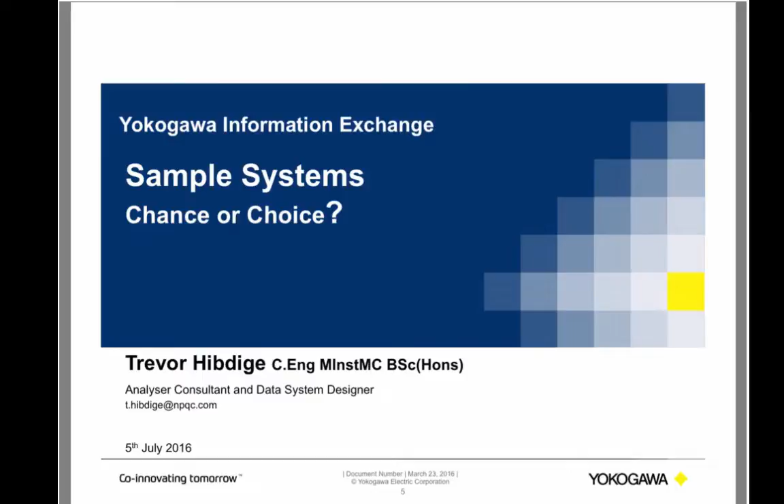So things have changed. One of the things that hasn't changed are sample system problems. So I've been asked to put together this presentation on sample systems. I've entitled it Chance or Choice. It's basically some key highlights about what goes wrong, why it goes wrong, and what we can do to stop it. So what I will do is launch straight in. We do have an opportunity for questions and answers at the end, but if you've got something so important that it can't wait, flag it on the Q&A as urgent, and we'll see if we can't build it into the running of the session.

So we're going to talk about some key areas for sample handling design. You've bothered connecting today because you have an interest in this. You may have specific problems in mind and need immediate help, but some of the areas we consistently seem to be working with can be summed up in quite a few bullet points. We're going to cover 5 areas - the classic pitfalls, which is where we do it wrong, and then move into how we could do it better. Basic design strategies will be a few key points that help us understand why we've gone wrong and where we should work towards, highlighting where we should be focusing.

One of the key areas that is going to come out of all this is understanding response times and what we can do about them and what are our expectations. As a wrap up, we'll go to future trends and try and throw some light on what's going on in development. So without any further delay, I will slip into classic pitfalls.

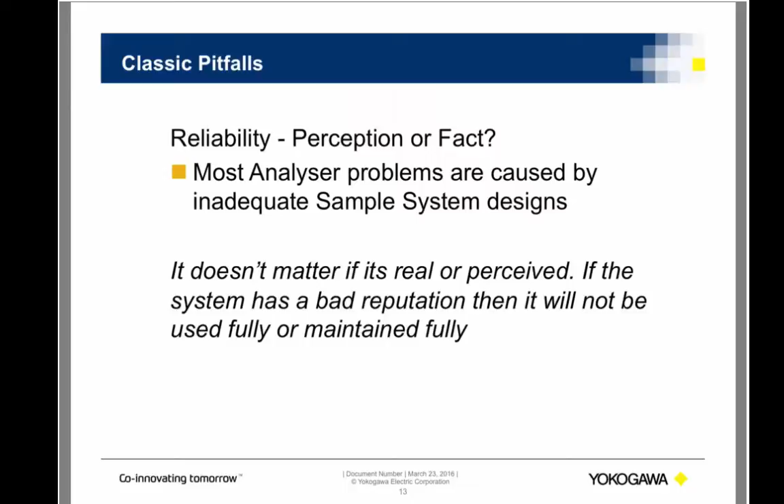And unless we address this fundamental pitfall, we're not going to get anywhere with our acceptance of an analyzer system or our design.

Response time is probably one of the most misunderstood and argued about factors in analyzer performance. And I'll make a statement here that an analyzer system that responds so slowly as to be boring or irritating to those using it or maintaining it will receive little attention and poor maintenance.

A lot of people can sympathize or empathize with that statement, and it's something that we hear today in 2016. But if you look at the publication date from this particular statement, this was September 1959 in the American Chemical Society publication. So we're looking at something that is 50 something years old, and it hasn't changed.

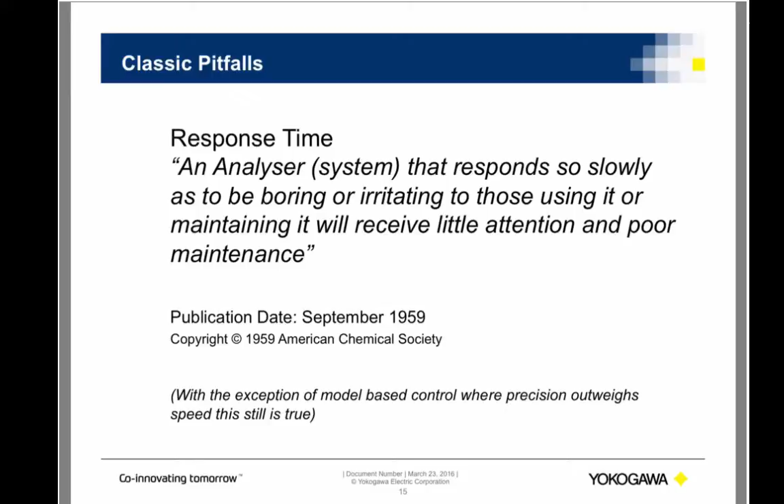With the exception of model-based control where precision outweighs speed, it's still true. Analyzers that respond slowly that are irritating and boring, we don't maintain them. We don't look after them, and they fall into even more disuse or upset the perception of other equipment.

So I want to summarize our classic pitfalls on this slide. Our primary consideration should be, who is the customer for the analyzer data? We forget who the customer actually is for analyzer information. We install an analyzer, but if nobody's going to use the data, what's the point?

We install an analyzer and the information is not timely enough, what's the point? Our customer is the one who ends up paying for the equipment, the user of the data, the maintainer of the data. And if we forget who the customer is, we will lose our focus.

Our customer is the process system, whether that be the process control system, or whether that be the environmental monitoring system, or whether that be the safety system. One of the things I've not mentioned yet is safety. Safe analyzer systems are a given.

I'm not going to preach about how we can design safe analyzer systems and how we must always keep safety in mind. That's a given. So whenever we see any statement, safety's in there, even if I'm not using the words.

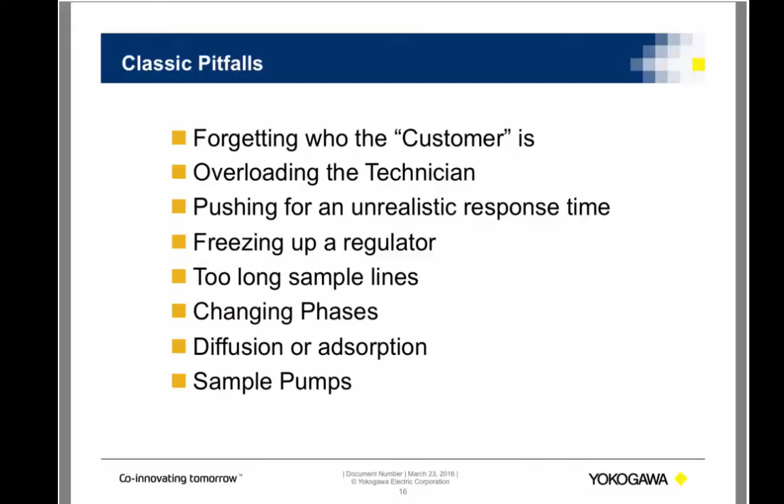So, basic design strategies. What should we be looking at? Where should we focus? So, basic design strategy, we should start off with what the analyzer needs versus what comes out the process. It's a basic statement. If the analyzer needs a vapor sample, there's no point in sticking liquid in it and expecting the system to work. It's fundamental, but the number of times we see the wrong preparation of a sample for what is being done to it. So this basic strategy is look at what the analyzer needs, look at what comes out the process.

The bit in between is going to be your sample system. If you make it complicated, it'll break down and it'll need lots of maintenance. If you make it too simple, it may not do what it needs to do.

The second most important thing in a basic design strategy is understanding the pressure drops that happen throughout the system. A lot of people are not familiar with what goes on inside a sample system. They want the sample system to do a job, but when we're talking about designing a sample system, we have to understand where the pressure drops are and what we have to do to keep the system working at its best efficiency. And that leads on to maintaining the system.

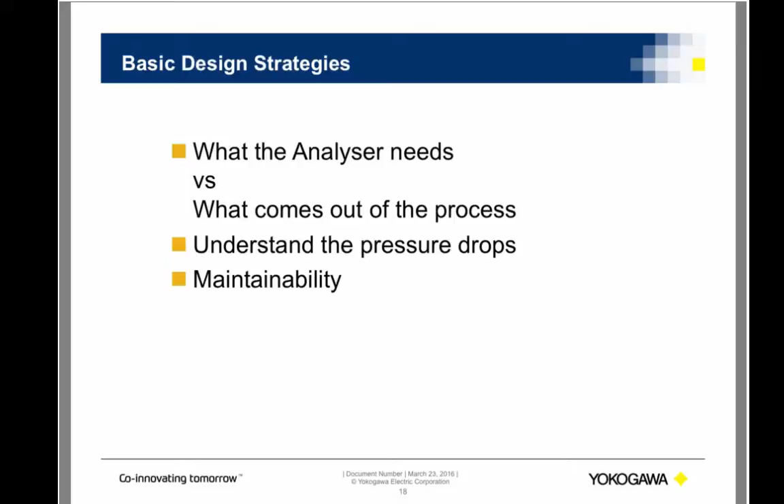Our basic design strategies should include pulling the thing apart, cleaning filters, changing bits and pieces. If we don't think about it during the design, then the technicians who have to maintain it are just going to look at the equipment and swear and curse and complain about another pile of rubbish come out of supplier A or supplier B, and why doesn't anyone listen to them? So what we'd like to do is try and work towards better sample systems, accepting that we will still need sample systems.

So where should we focus? Looking at our sample system designs, we've got some key areas and basic strategies, and we've got a whole list of learnings that we've done on other projects. We should not be repeating previous mistakes. So where should we focus?

Well, we talked about understanding the pressure drops. Our basic design strategy says we need to understand how a sample gets from the process into the analyzer and how long it takes to do that. In doing so, we need to understand the pressure profile within that system and the stability of the pressure. We'll go through some examples in a minute where technicians who work out on site know it only too well. You turn the flow control on one part of the system and it affects somewhere else because the pressure stability in the original design is not adequate for what we're doing with it.

So the flow control within that system is subject to pressure stability, but even simpler than that, the selection of flow control is a bit like when you open the tap to run a bath and you get a tiny change in the hot water, makes it go from acceptable to boiling and burning itself. A little gentle touch on the flow meter and the thing goes off scale. We need to understand the flow control mechanism and focus on it so that the system we get is maintainable and stable.

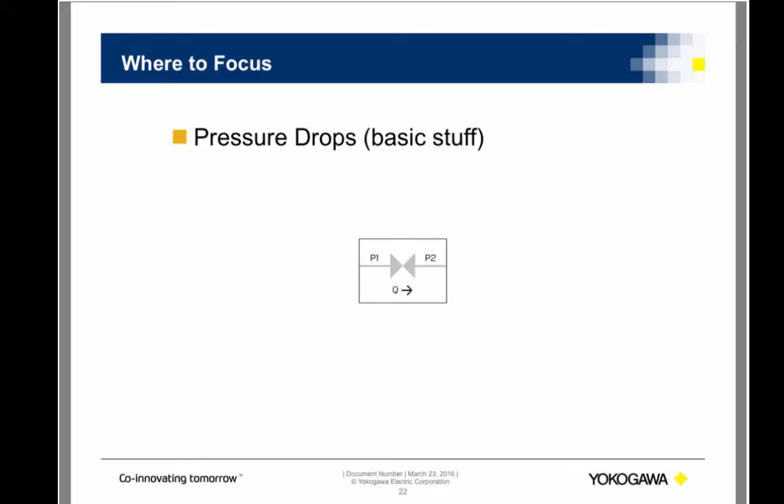Any feedback? No? Don't know. Okay, sorry about that, Trevor. Had to mute myself. Did you click the thing up in the upper left-hand corner, your pointer? That's it, that's what I had to do. Pointer, right, yeah, bear with me. What's the pointer look like? How about that? No? There you go. Yep, we see the yellow. You just circled something in yellow. Yeah, okay. Now, can you see I've got a big arrow pointing at this area? We don't see the arrow thing. So if I do that, can you see it? It shows now, the arrow showed up. Yep, okay, and how do I clear that? You might have to click next slide.

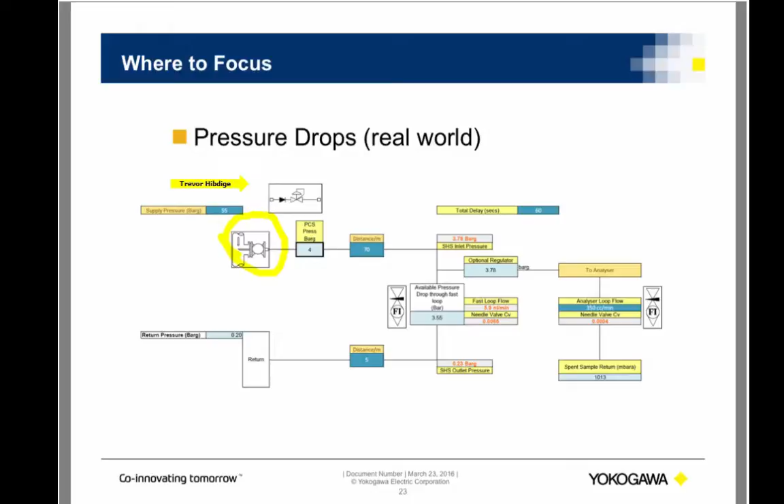In terms of pressure stability, what does that particular system give us? We said we put a regulator in here, so that should fix everything, shouldn't it? We stuck a pressure regulator in, pressure is controlled by a device. But if we go through and we look at what really happens in this system, let's push things to the limit.

Let's assume we have a 30-second response time requirement out of this system. It's hypothetical, but this is the kind of thing that goes on. We set our regulator at the takeoff to a certain pressure, but we ram so much flow down this particular tube to get to the analyzer that we lose a lot of pressure in the supply line. The figure we've got here is we're losing 30 to 40 psi, 2.3 bar, in the supply tube, and we end up with a workable pressure here.

It's not a problem. Everything's perfectly fine until we start changing flow rates. With a flow rate of 29 litres a minute, a 30-second response time - if somebody comes and fiddles with this fast loop flow meter, the flow control says that everything changes within the system.

If we just change that to 26 litres a minute from 29, that's not very much. We tweak it, the response time's only changed a couple of seconds, but the pressure's gone up here. We've got a change in pressure even though the regulator at the takeoff is unchanged. We've got a dynamic pressure balance within the system, and all that's going to happen here is this flow rate going to the analyzer, the flow meter will go up when we change this flow meter, and that is so annoying on site. Trying to balance a system designed like this means you spend half your time setting something and resetting something you don't need to do.

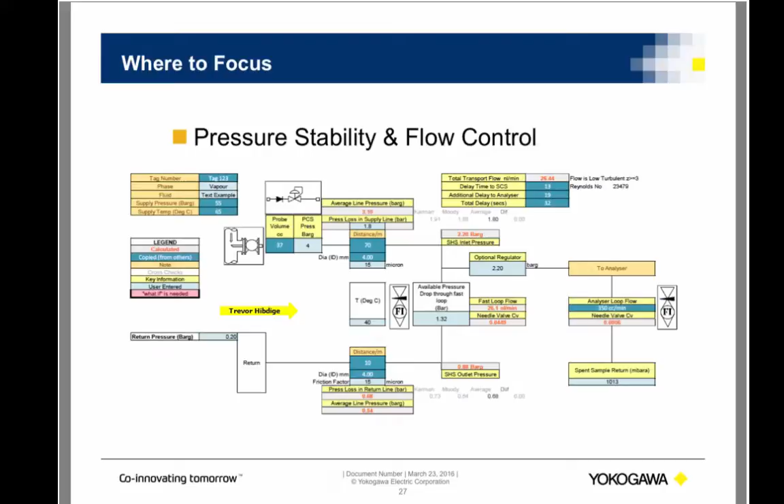We should spend more time looking at flow control, because at the end of the day, it makes for a better system, a more stable system, and one that gets a better reputation because we don't work on it as much.

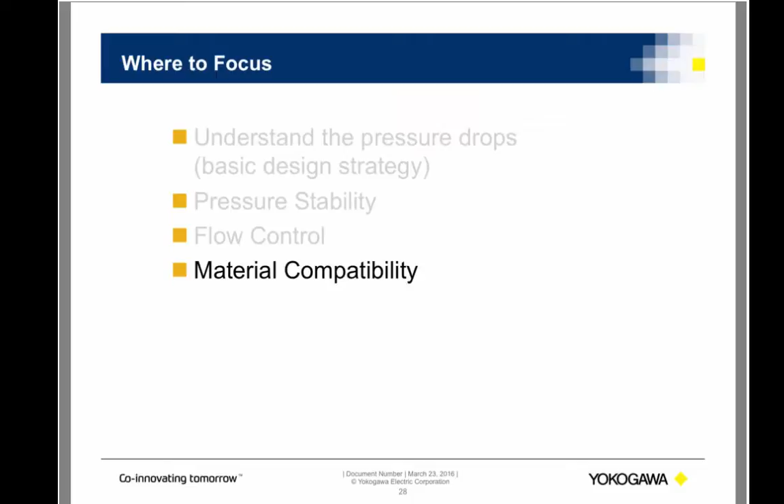Material compatibility. Our focus for material compatibility should be on our metals and our elastomers. We all know stainless steel is better than carbon steel. We all know that Teflon, PTFE, whatever variant, is more resistant but not as pressure containing. But we don't think about elastomers. We think we know that PTFE is better than Viton is better than nitrile.

But when it comes down to it, if we're going to design a sample system, if we're going to improve the reliability and maintainability of sample systems, we need to be better than thinking that we know it. We need to become more expert in materials.

The number of times we talk to suppliers like Swagelok, and they say, oh, we only make this particular variant. And we have to say, but as a customer, we want something different. We want something better because our particular application does not fall into your one part number fits all categorization of your catalog. So our material compatibility needs chemistry experts, it needs metallurgists, it needs people with experience and knowledge.

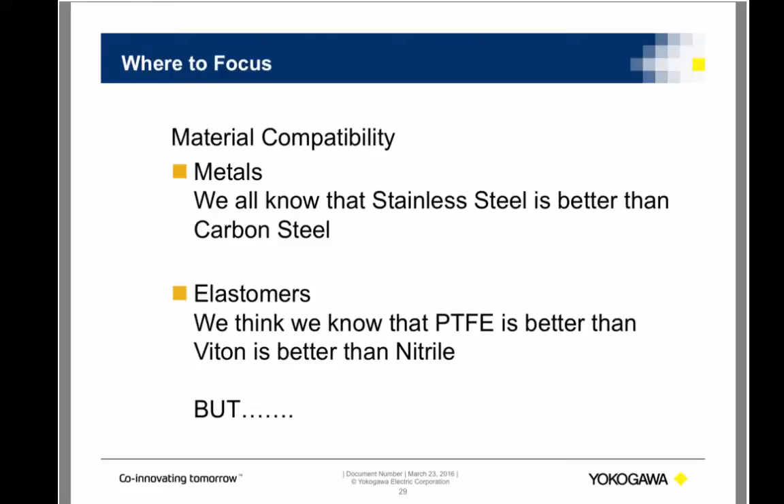And also people who are prepared to stick their necks out and say, I know that the best possible thing for this application is ABC. Far too many examples of people not committing to making a decision, and you end up with a system by default rather than a system by design.

So, moving on to understanding response times. Let's talk about what is the analyzer response time, what is the sample system response time, and when it comes down to it, we need to agree a response time for the system.

It's easy enough to say that the response time of our oxygen analyzer is a T60 response time of 120 seconds. At the end of the day, that's useless to anyone except the salesman who can quote you numbers, and we meet a hypothetical specification. T60 figures are useless, T90 are not much better. We need the time taken for the analyzer to respond to a change in what's going into it.

And if that takes 5 seconds, then at least we can quantify it. If it takes 5 minutes, it doesn't matter as long as we know about it and the application can handle it. We use cyclic analyzers an awful lot.

We still use automated laboratory techniques in automated titration and devices such as TOC analyzers. They have a finite response time. They take 8 minutes, shall we say, to produce a result. So their minimum response time is 8 minutes. And it's no good a process saying, oh, we need a 60-second response time out of the TOC analyzer. If it's got an 8-minute cycle time, it's never going to be 60 seconds.

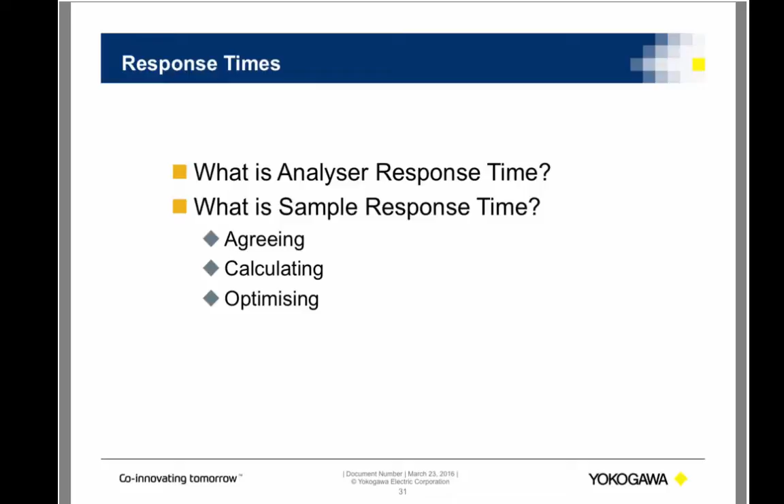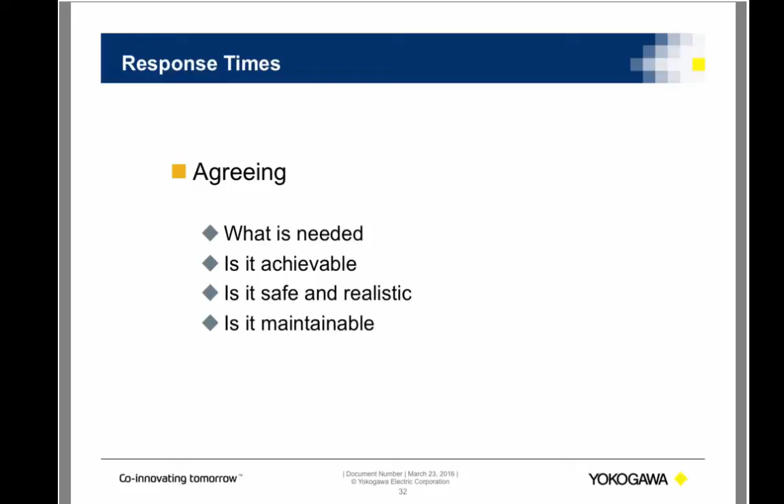Somebody once said, oh, we've got to have a response within 1 minute. Let's agree a response time for the system, and if we can't meet that response time, let's calculate what we can actually achieve, and then let's optimize that response time and then discuss, is it acceptable? Rather than just throwing this 60-second figure in, we need to know what is needed and is it achievable, and to achieve it, is it safe and realistic?

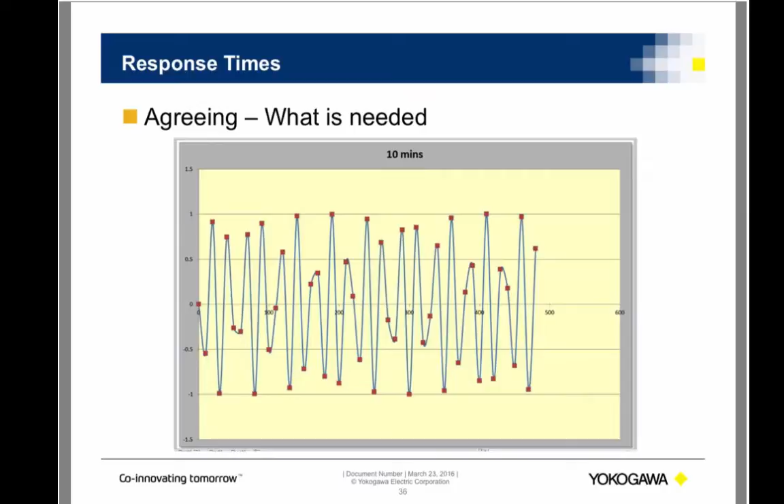If we reduce that response time to 30 minutes, our picture changes again. I'm coming to the point where we can see what is happening by making the analysis faster. Look, if we go to 10 minutes, the picture is completely different. We started off with a 2-peak sinusoidal curve, and this is maybe what's going on in the process.

Agreeing what's needed is one of the starting points to enable us to design the system. And if the process responds so fast that we need fast results, then that's fantastic. We've got a starting point, we can try and design it.

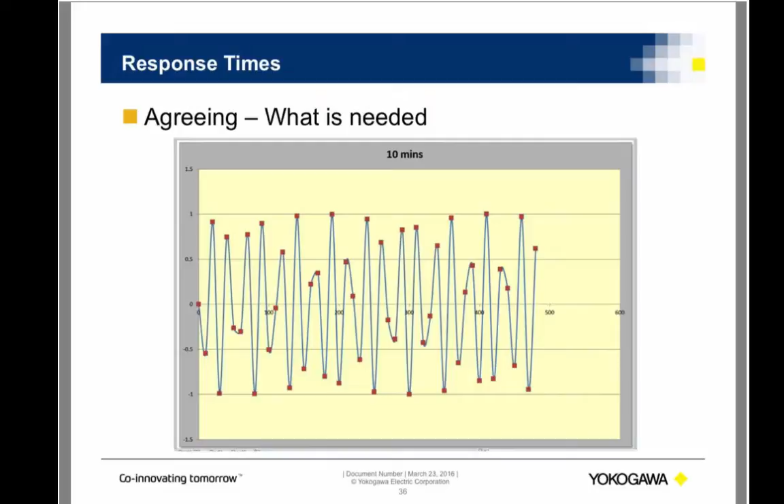But if the process takes 12 hours to respond to a change in concentration feeding the reactor, then we don't need a 60-second analysis. It's a kind of accepted norm that your measurement has got to respond at least twice as fast as the process. Otherwise, you can't see what's going on. So, general rule, somebody tells you 60 seconds, well, the process has got to be changing within a couple of minutes. And if it's slower than that, then the 60-second rule shouldn't really apply.

Having established our response time, we need ways of calculating it. And I looked up, there are 7 different ways that I can calculate the pressure loss in a flowing tube or pipe. It's no wonder we all come up with different answers.

I'll tell you the pressure drop is 15 psi. Somebody tells me, no, it's not, 17. And they're using an equation that they believe to be accurate. In all honesty, we don't calculate pressure loss, we estimate pressure loss. What we should be doing is designing for an estimate, and then when it comes out on site and we've actually got some feedback and we know what the pressure drop is and we set the regulators and flow meters to our optimum conditions, we should then be writing down those optimum conditions.

But how many times do we have to build a system where we have to put the set point of the pressure regulator on an engraved label, and when we get to site, the engraving's wrong, we have to change it. So loads of different ways of calculating them.

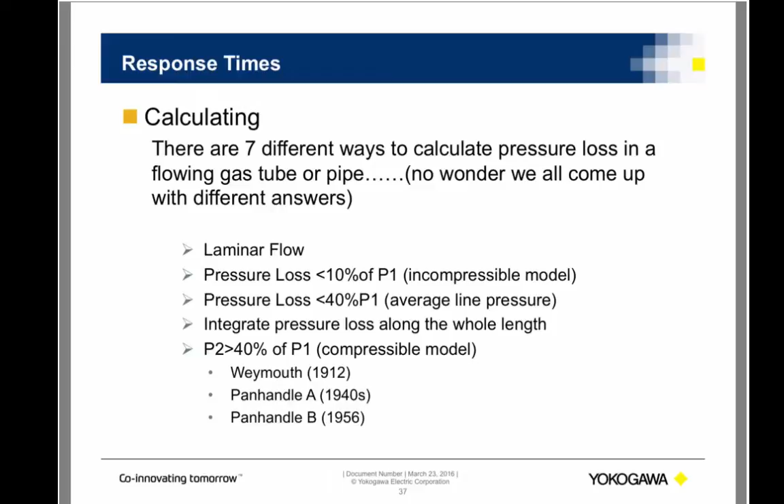I've got laminar flow, small pressure drop, medium pressure drop, high pressure drop, and some gorgeous equations: the Weymouth equation of pressure drop, invented in 1912 and still used, and Panhandle A and Panhandle B. They're used for compressible gases along long lengths of pipe, and they come up with different answers that may be more accurate.

So we calculate pressure drops through the system using different tools. For analyzer sample systems, the tools available are pretty inadequate. Basic process pressure drop calculations don't show us what's going on. So we've developed our own spreadsheet which allows us to look at what goes on in the sample system, and we can estimate sample system pressure losses.

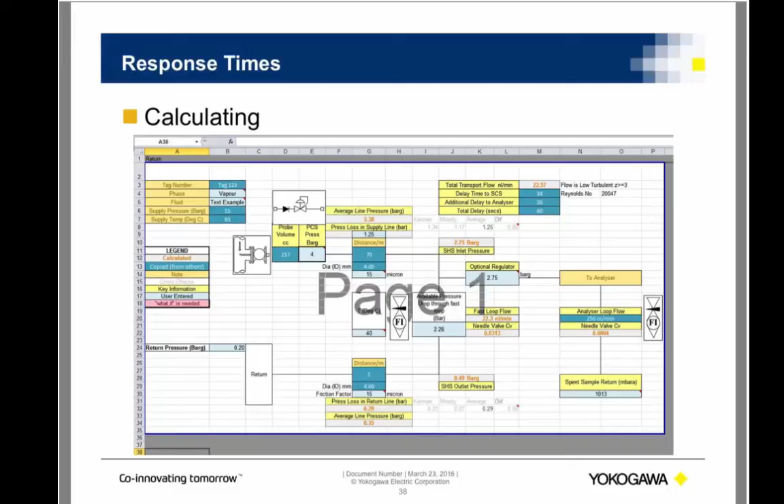We know what to expect for our response times. Having established where the pressure drops are in the system, we can draw a simple picture to show where the sample is spending most of its time. I'm a great believer in pictures—it's a lot easier to show what's going on than to explain it. Many years ago, somebody commented to me: if you need to explain a picture, you've not drawn it properly.

This particular picture—if you could read it, and that's where I've not drawn it properly, the font's not big enough—shows the pressure drop in the sample probe, the pressure drop at the front end of the regulator, at the takeoff and the back end of the regulator, the sample transport line, and then the sample system to the analyzer. We don't often calculate that, or we don't calculate it accurately.

If we want to optimize response time, if you draw this picture, it's real easy to see where we should be working. We should be working at reducing the response time to the analyzer, not making the fast loop run faster. The first thing we need to do to optimize is increase the flow rate going to the analyzer, if that's possible. If we do that, the picture changes immediately.

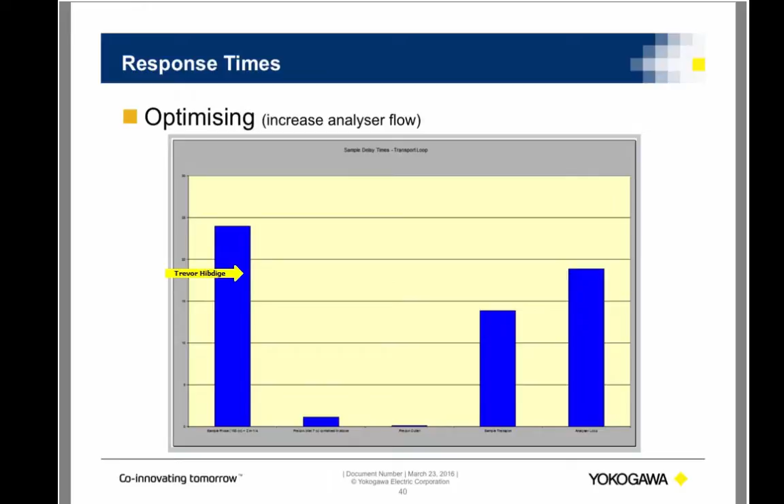We're really interested in how long it takes to get from the tip of the probe to the analyzer output, whether that be 4 to 20 digital or whatever it is. If we're spending 50% of the time in the sample probe and then it whips through everything else, then we can focus here. So if we were to change the design of the sample probe in this particular example...

Our overall picture changes—we can see now it's spending most of its time in the transport tube. You can't do much about that without increasing the flow rate, and if you can't do that, you need to move the analyzer closer to the takeoff. It's all about what do you actually need versus what you want or what you think you want.

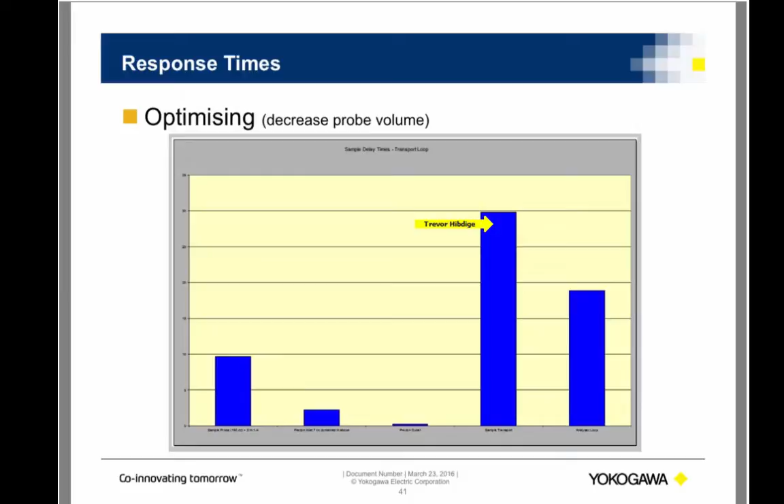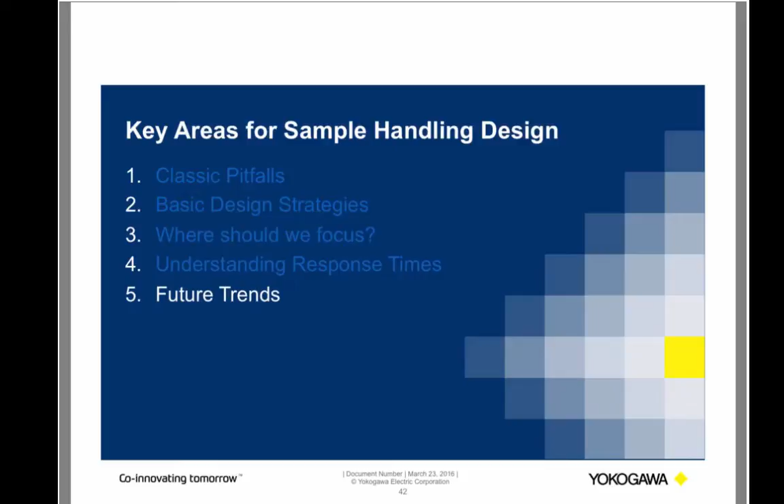So moving on to our future trends. We've looked at sample system design, which appears to still be making the same mistakes as we did in 1959. We like to think we're better. We need to learn from what we've done, listen to feedback from installations we've had, and use this information in our future designs. But what are trends giving us for improving our lot in terms of analyzers?

Well, the ultimate that they'll all tell you is, oh, you want an inline analyzer—you can put our analyzer directly in line, don't need a sample system. I think that's fantastic; it works for some equipment but not for others. A typical inline analyzer might be an oxygen analyzer, a TDL, a fiber optic insertion probe, an online or inline refractometer. They have minimum response times, but if they break down, you've got the problem of taking them out of the process. So I see more developments coming in inline analyzers.

We're working more with fiber optics. Fiber optics allow us to use spectroscopy techniques to get composition information, and that allows us to mount the equipment either next to the process takeoff or in an environmentally controlled analyzer shelter, and use fiber optics to carry the information back to us.

Developments that we must work on are analyzer data systems. We have all of this information being generated out in the field, and we increase the complexity of the information and the loading on our maintenance crews, but we don't provide them with the tools to analyze the data. The only way that we can plan and control our future is to analyze the past. So data systems really need to be developed much more than they are today—not only developed, but accepted and implemented, leading to almost self-diagnostic systems.

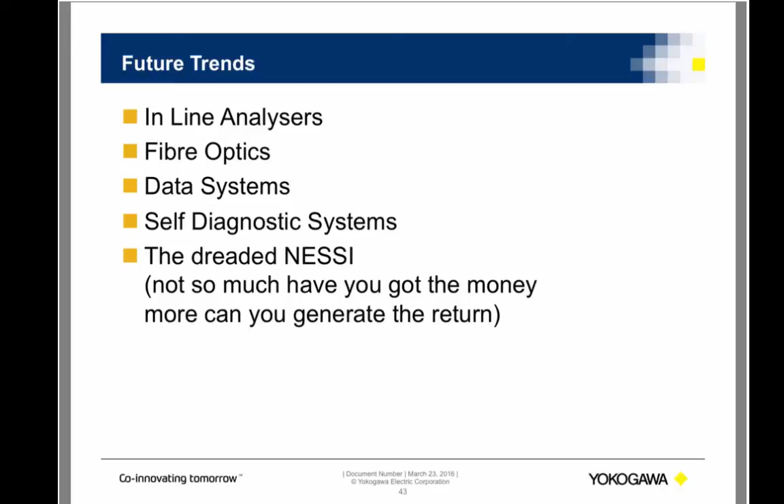It's miniaturization, but it's not so much about whether you've got the money to implement it, it's whether you can generate the return. NeSSI is supposed to increase the reliability of the system through automation. We're supposed to be able to make things smaller. We're supposed to be able to make things cheaper. We haven't got onto the cheap bit, but some of the spin-offs from it are really about size.

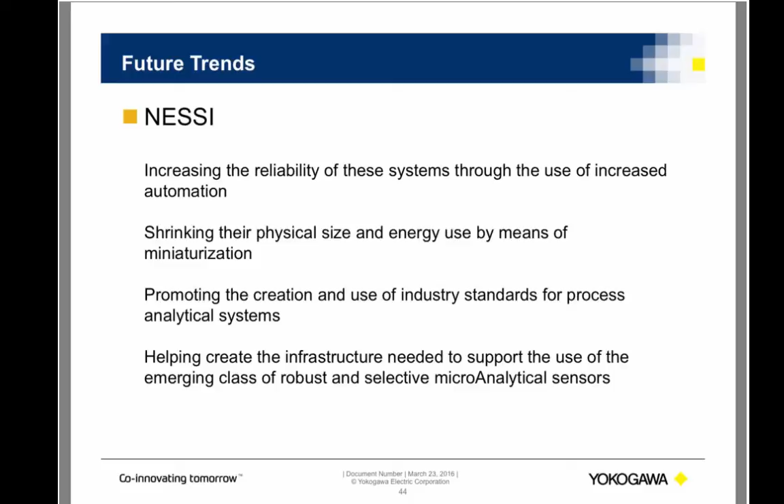So what do we look for tomorrow? I think tomorrow our industry is still going to need sample systems. Our industry will still complain about the costs. The EPC will moan about how much the supplier charges, then they mark it up and the end user complains about that. And then the spare parts are expensive. We'll still continue to complain about the cost.

And I think our industry will still do it wrong. But we need to change that. We need to change it by focusing where we look, where we concentrate, and we need to listen to feedback from others about how to improve. So tomorrow our industry will need more people to understand how to do it before we lose the art.

I've been doing this 40 years. The average age of analyzer expertise is constantly increasing and we are losing experts. We need to bring more people into this aspect of industry, and we need to help them understand what we do and how to do it themselves before we lose the art.

So at this point, I'd like to hand over to questions.